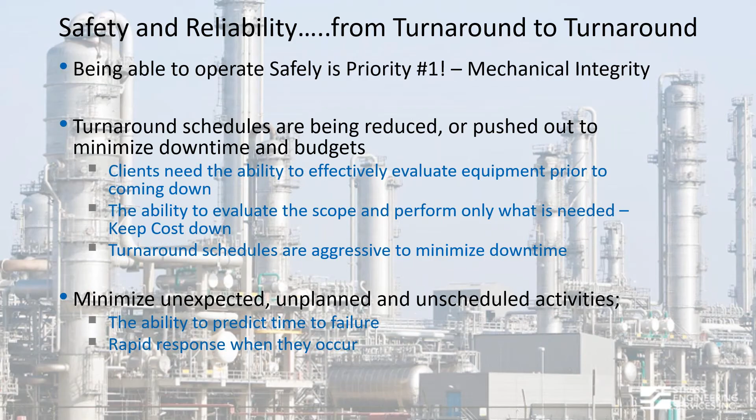Stress has been providing physics-based insights for clients for over 48 years. We got our start in the power generation industry, specifically nuclear, providing stress certifications for piping. As the nuclear industry began to slow down in the 70s, we moved our skill sets over to the oil and gas industry. Over the years, we have expanded into over 15 different industries, ranging from power generation, oil and gas, pharma, consumer products, aerospace, rail, and medical technologies.

The physics are the same throughout all of these industries. As we have expanded the industries we are serving, we continue to invest in our ability to deliver value to our customers. By participating in many different industries, we're exposed to many different problems, materials, and technologies, which enables us to transfer technology from one industry to another.

An example of technology transfer is how we utilize the skills developed in our lab performing full-scale testing, such as custom sensor design, data acquisition, and digital twin modeling, to measure G-force exposure during manufacturing and shipment of vials of biologics. This biologic was unable to experience excessive G-force, so we designed a sensor the size of a dime that could fit into a vial to measure force and validate handling precautions.

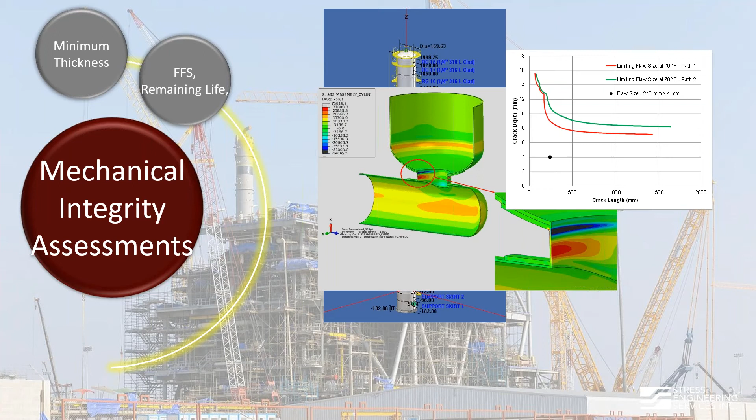Characterizing damage and performing fitness for service activities. The methods and acceptance criteria are fairly standard throughout the industry. However, the accuracy and applicability of the damage characterization, as well as bounding of the unknowns, can make a big difference in the results, conclusions, and the determination in the need for mitigations or other actions.

Checking the structural stability during maintenance or repair operations. Examples include, but are not limited to, access openings and stability during post-weld heat treatment. These types of assessments need not only consider the structural strength, but the potential deformations and their effect on the usefulness of the components after completion of such activities.

Considering the effects from process or heat transfer, whether it's consideration of the potential for slug or hammer flow in a piping system, or the expected thermal effects resulting from loss of insulation or refractory. Stress engineering can provide insights to these potential or actual conditions or scenarios.

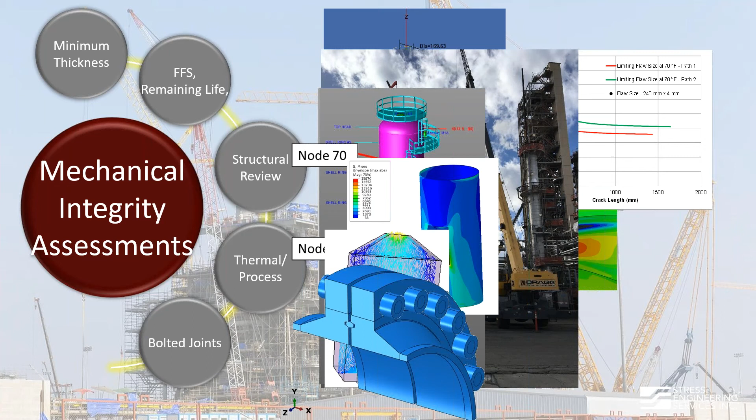Reviewing and assessing bolting joints, including, as applicable, the effects from thermal transients, in addition to checking stresses, reviewing gasket selections or bolting procedures. How the joints are expected to react to upsets or other thermal transients can also be simulated.

Collecting additional field data to validate or improve the precision of equipment models and assessment activities. This could be additional dimensional information requiring measurements or laser scans, material property validation that can be determined from testing of small material samples, or collecting strain, temperature, or actual acoustic emission information to determine more realistic loading and specific materials resistance capabilities. Derek has some further details on data collection services we can provide.

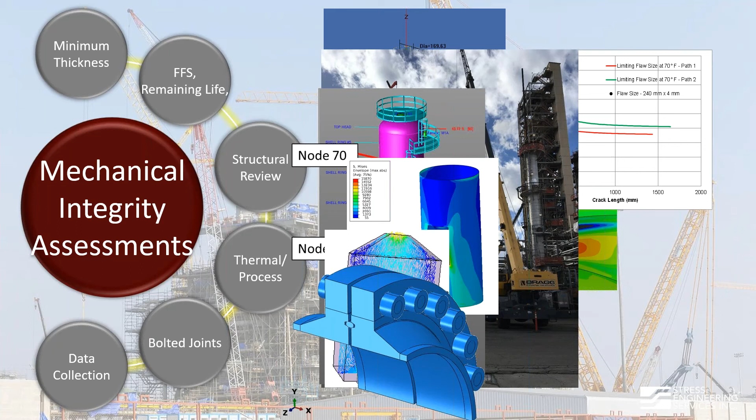Thank you, John. In the opening slide, I discussed how we support customers in evaluating critical components, whether it's for delaying a turnaround or evaluating an unexpected anomaly. What I can't emphasize enough is the more accurate the data, the more accurate the modeling and resulting assessments.

Typical types of data collection are acoustic emission testing, which provides a global screening of components to detect the active cracking in those components. This can actually be performed prior to a turnaround or a shutdown in order to detect those active crackings and locate them for further direct assessments during the turnaround.

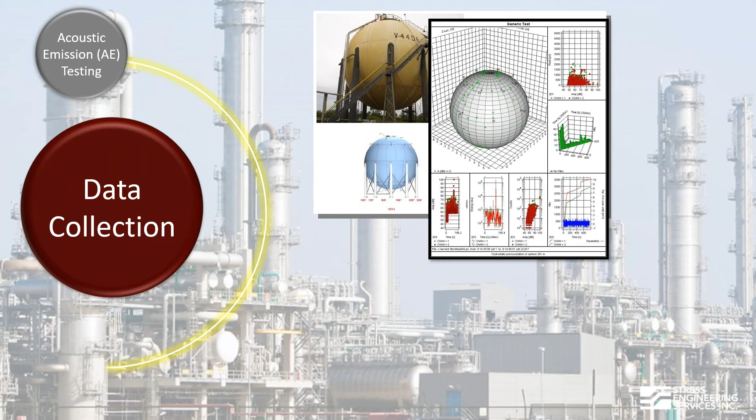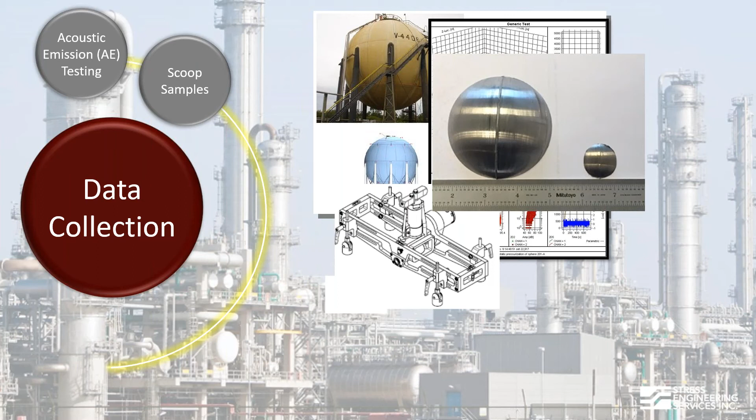Then there's our scoop sampling. It's the ability to extract material from in-service components to measure the properties of those materials. The scoops can range from about 1 1/4 inches to 3 3/4 inches in width. You can see the two sizes here in the picture.

In addition, we've got our rod load measurements, which is used for high energy piping. It enables us to offload a hanger and measure the load in that hanger, and determine the high stress areas in those particular locations.

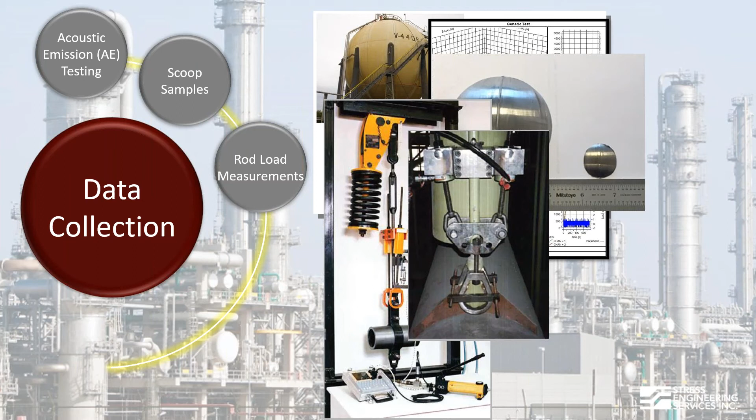Instrumentation, strain gauges, thermocouples—I'm going to talk more about that further in the presentation. But in addition, we've got laser scanning, and also there's digital image correlation, which is the use of optical techniques to acquire strain data.

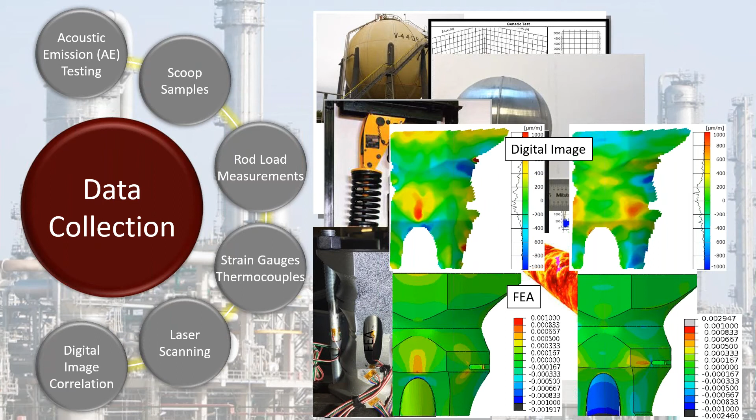Through the years, Stress has leveraged their expertise in sensor development, data acquisition, and data interpretation. Stress started performing full-scale testing over 40 years ago, and through the years we have developed significant expertise in those areas.

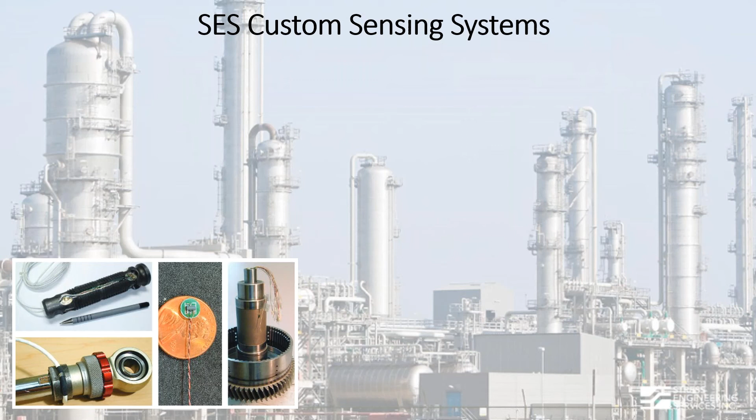As I outlined in my previous slide on how we transferred that technology from one industry to another, this slide demonstrates well how we took that technology from the shop or a controlled environment and moved it to the field in a manufacturing environment.

Many of you have seen this slide before at this conference. This slide outlines our coke drum health monitoring program, which starts by utilizing a laser scan to define the geometry of the coke drum, and it identifies the high stress areas of the drum.

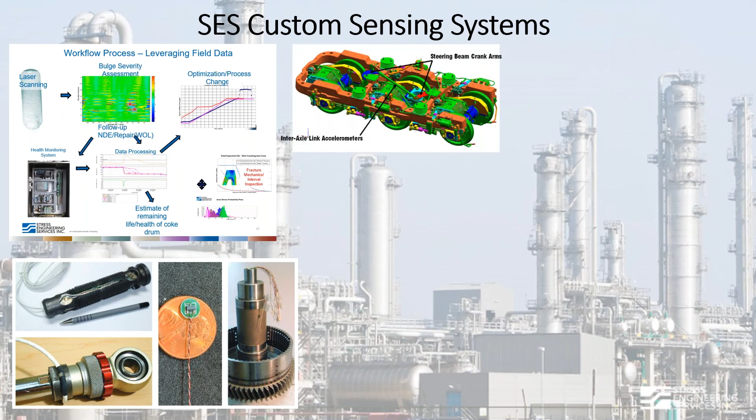We utilize that information to determine where we will locate our sensors and develop our repair plans for the bulges if needed. The sensors on the drums enable us to determine the rate of damage created by low cycle fatigue and provide feedback to the operators for optimizing the parameters to minimize the damage. Also, you can see on the slide a rail car bolster.

We have instrumented many cars through the years, and this particular one stress measured strains at 94 locations on a vented and non-vented bolster for powered and unpowered trucks, at known and potential crack locations and at various mid-plane locations to measure the overall structural response of the frame. We also measured accelerations and displacements of the truck and bolster while monitoring the GPS speed and location.

What you also see on the screen here in the middle is a tire mold. You can see there are 3 sensors in the mold, and we developed custom sensors to put in the mold with 6 degrees of freedom. These molds were being fabricated through additive manufacturing, and the sipes, which are the joints or lines in the tires, were cracking, so they wanted to measure the force being applied with the rubber as it pushed into the tire mold. So we had to develop custom sensors for that particular application.

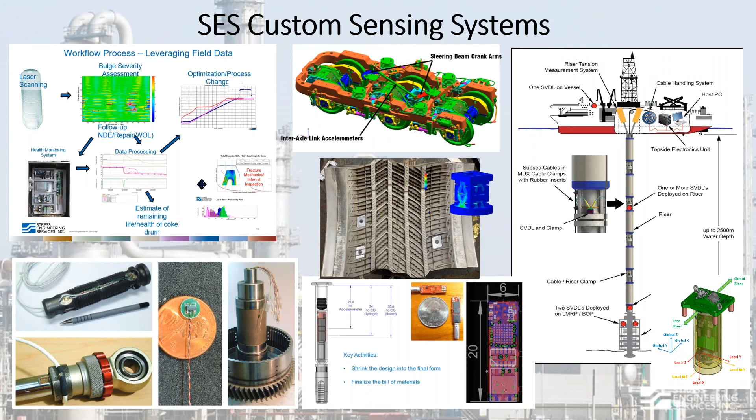At the bottom, you can see the valves that I spoke about earlier. These particular valves have accelerometers in them. In that mid-bottom picture, you can see a quarter on the table, and next to that quarter is an accelerometer that's going in the valve, to measure the G-force as the valve is passed through production and manufacturing, but also as it's being shipped via logistics. So you can see through this wide variety of applications for custom sensing, we've taken that technology and advanced it several ways.

So on the previous slide, I showed you examples of custom sensors and many different applications we have used those custom sensors in, to measure such things as force, whether it be those valves or, as I showed, the rail cars. But I want to provide you another example of some other different components we are measuring and how we have advanced this technology for condition-based monitoring.

As you can see on the screen, these are riser joints, which have a 5-year inspection criteria for being inspected. This is accomplished by rotating 20% of the riser onshore every year to be disassembled and inspected. This requires extensive boat trips and trucking of the risers. There are typically 20 riser joints from each riser system, transported on a boat, and 1 riser per truck to an inspection facility each year, making the logistics of the drilling inspection very costly.

These risers are obviously below sea level, and in that subsea application, these risers are bending much like guitar strings as they interact with the ocean's currents, causing damage at the joints.

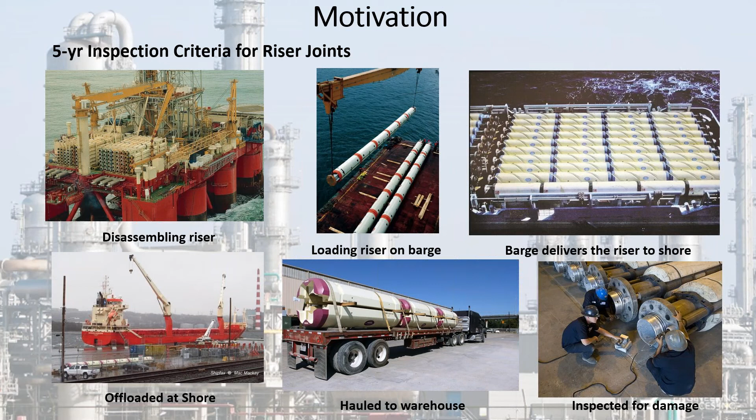Because of the cost and time required to inspect these joints, customers needed another approach, which was to move to a life cycle condition-based monitoring and inspection system that could be deployed on a mobile offshore drilling unit. The new riser monitoring system measures the load at the joints along with in situ drilling information and metocean conditions, from which riser joint fatigue damage would be determined and riser joints identified for inspection. Utilizing this process and incorporating machine learning, customers were able to experience significant savings in downtime.

Okay, Derek, thank you. Despite the specific industry, the types of equipment are typically consistent. Stress Engineering has experience in analyzing and assessing these common types of equipment and their components, as well as the technical expertise to assess the unusual or uncommon equipment types.

On pressure vessels, code and other industry RAGAGEP assessments can be provided to verify code compliance, to determine the acceptability of the current condition, or to estimate the remaining useful life or required inspection interval.

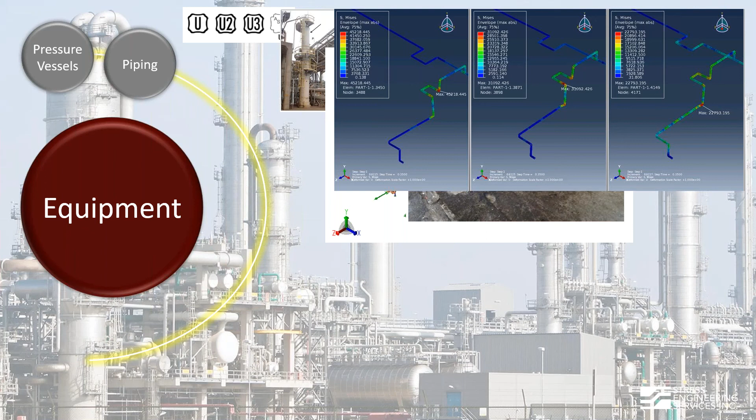Piping flexibility using traditional linear elastic or more advanced elastic plastic modeling can be utilized to verify not only code compliance, but also the localized effects from deformations or changes expected from high temperature exposure. Field verifications, including actual loading determinations on supports and hangers, can be performed in conjunction to maximize the accuracy of modeling activities.

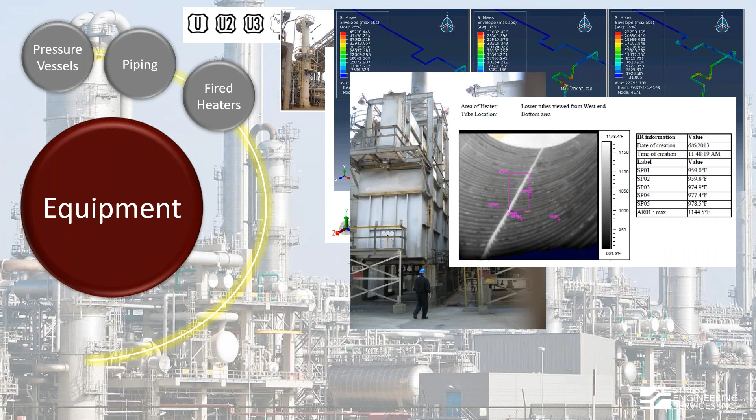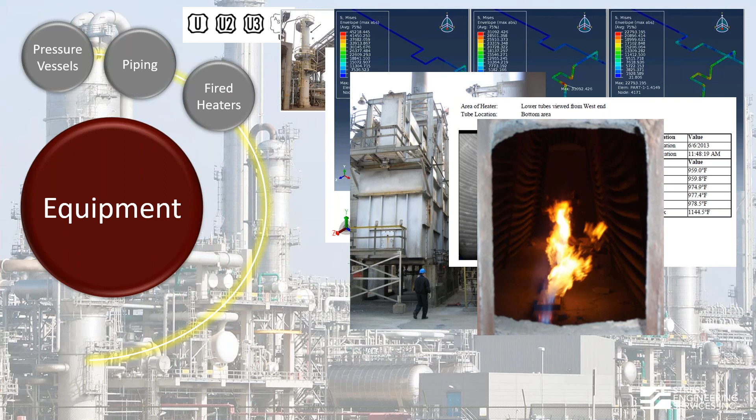The remaining life of tubes in fired heaters provides many challenges, from incomplete loading data to uncertainties in material properties. Stress Engineering offers the full range of assessment of fired heater tubes, from traditional remaining life determination to specific property determination using our accelerated creep testing facilities.

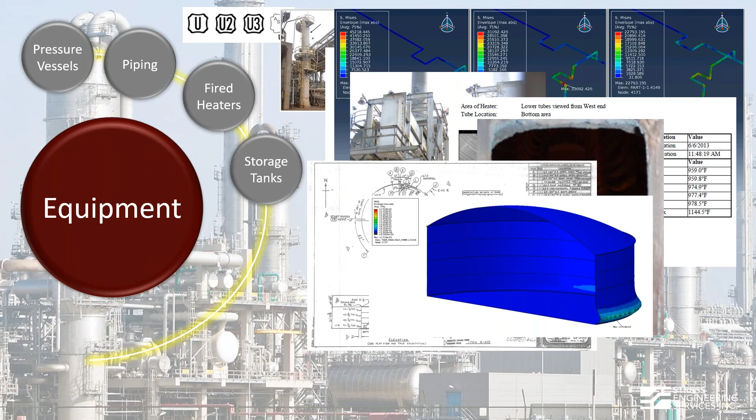From wind exposure to compromised foundations to damaged components, all in combination, Stress Engineering can provide authoritative assessments of storage tanks.

Heat exchangers are a subset of pressure vessels. Stress Engineering can assess the traditional TEMA designs, the air-cooled fin-fan coolers, as well as the compact plate and frame type exchangers.

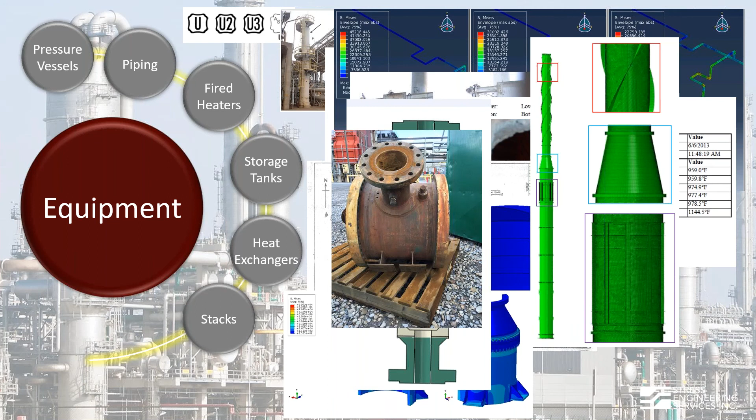Stacks, although similar to process towers, are subject to different acceptance criteria. Stress Engineering is familiar with the unique requirements for these assets and can advise on various mitigations and repair options.

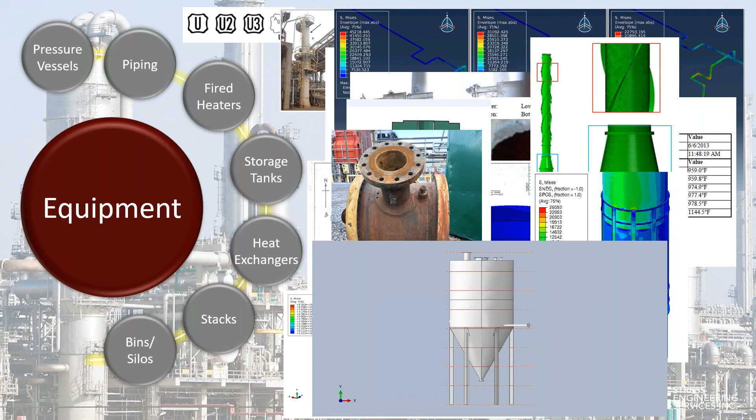Storage bins and silos, also similar to process vessels, are subject to differing loading conditions from the internal product. Stress Engineering can address these types of equipment and their unique loading.

Since one size does not fit all, and a computational solution to the degradation does not always result in an acceptable as-is condition, Stress Engineering can assist in the conceptualization and validation of unique and specific repair mitigations, clamps, and/or enclosures following the requirements of ASME PCC2 or other typical RAGAGEP for these types of solutions.

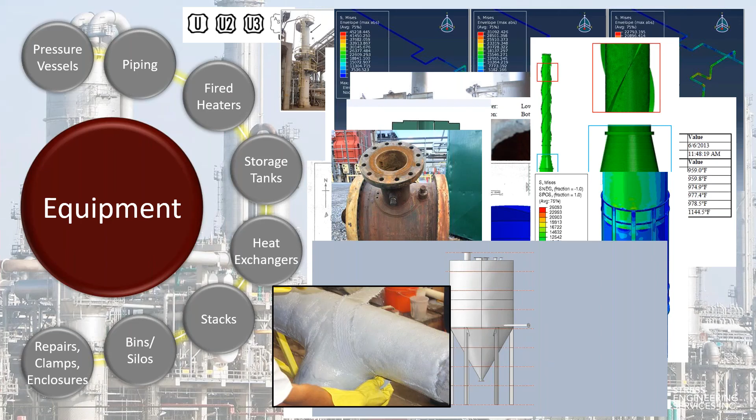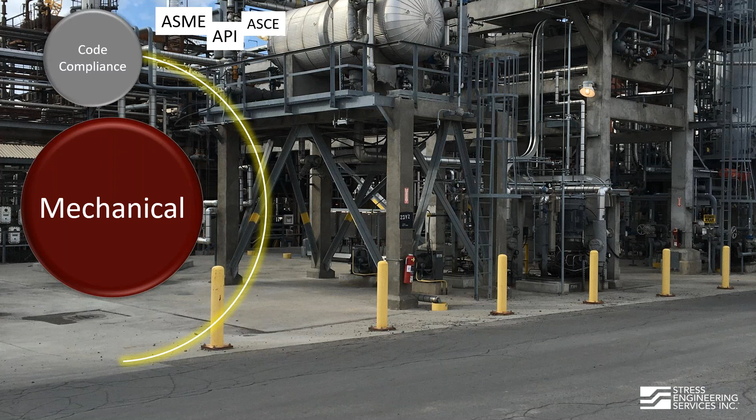Mechanical assessments of typical process equipment can run the full range from verification of code and fabrication rules to advanced modeling such as finite element analysis and computational fluid dynamics, to full-scale destructive testing.

Whereas traditional code formulas and approaches address design for a specific purpose, the use of these advanced techniques better quantifies the actual loading and material responses, therefore allowing for an assessment of a seemingly degraded or compromised component, and allows us to better quantify the reduction in margin, if in actuality any, from the original design basis.

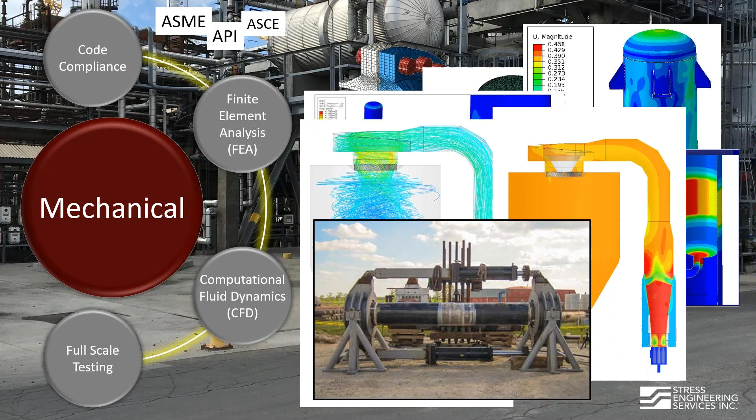Stress Engineering has full-scale testing at 3 locations in the Houston area, as well as high temperature and non-metallics capability in the Cincinnati office. Just a few examples of testing services that Stress Engineering can provide.

In addition to our polymer science testing, Cincinnati is home to our state-of-the-art accelerated creep testing facility. Over 60 fully instrumented creep testing machines can apply controlled loading up to 100 kips at temperatures up to 2,000 degrees Fahrenheit.

That's plus or minus half a degree Fahrenheit, while measuring strains on the order of 10 to the minus 6 per hour, with the results expressed in both MPC Omega and Larson-Miller parameters.

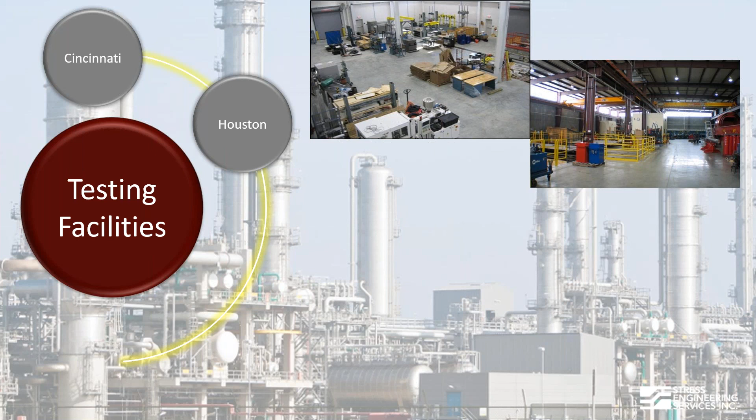In Houston, fatigue testing can include full-scale, mixed loading, have the effects of corrosion included, as well as resonant bending fatigue testing. From over 6 million pounds to less than a gram, a full range of standard and customized tensile compressive testing can also be accommodated.

In Waller, Texas, and in our Moore facility, burst testing up to 60,000 psi internal or 30,000 psi external, as well as other load testing, can safely be conducted.

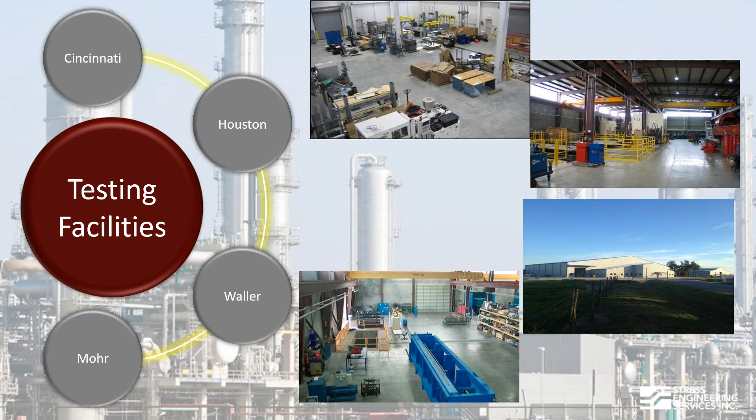Thank you, John. I'm going to describe here our materials and metallurgy capabilities.

Failure analysis and material testing, including the quantification of damage from creep as well as other damage mechanisms, is integral to assessing the mechanical integrity of equipment and components. Stress routinely performs these activities for our customers as part of a fitness for service assessment or remaining life assessment, to help them determine if a component can make it from one turnaround to the next.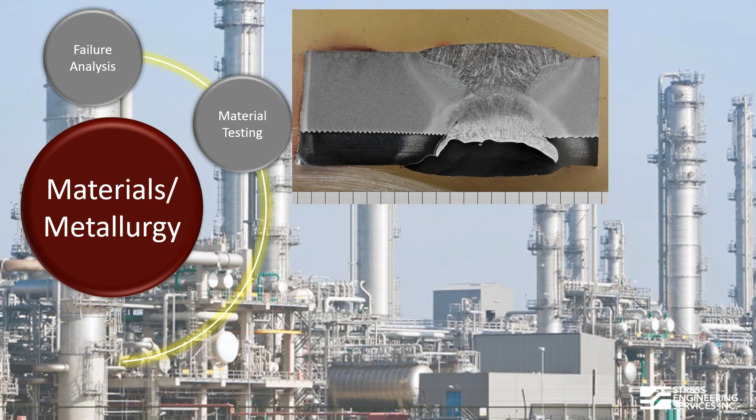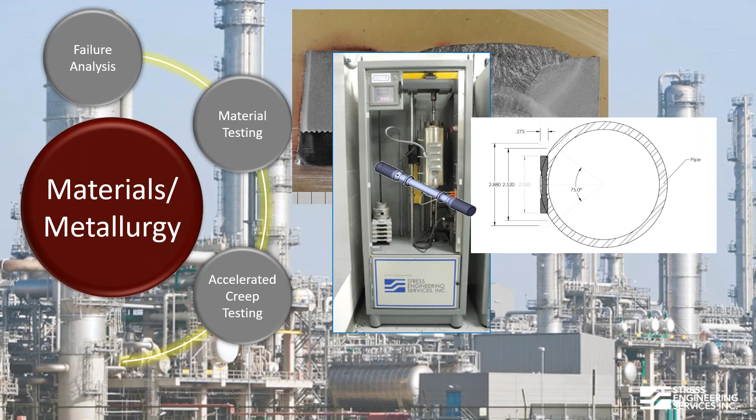Failure analysis - understanding why a material failed is as important as understanding why it succeeded. A large portion of the materials work that Stress performs is directly or indirectly related to failure analysis. Whether it is validating a material's performance in an environment through comparative testing or understanding why a material failed, Stress has state-of-the-art equipment along with experienced material engineers to perform that.

From the material testing capabilities, we do full characterization of materials, which include chemical compatibility, aging and life assessments, creep and stress relaxation. In addition to that, we do a lot of accelerated creep and fatigue testing, and as John outlined before, we have over 70 creep frames in our lab.

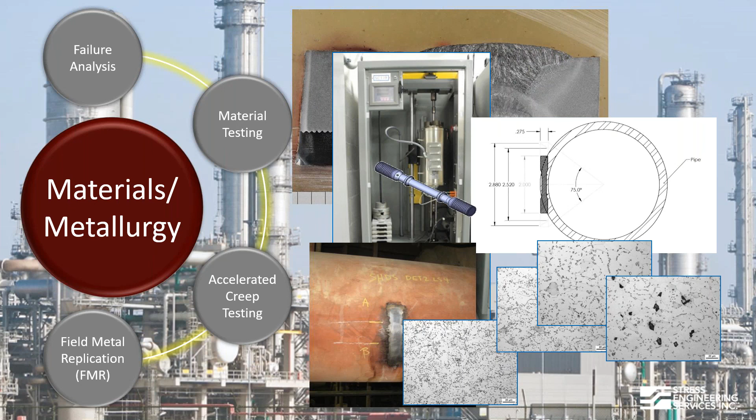So here's some examples of some material testing we've got. This slide shows examples of several material test methods used for evaluating materials. Fatigue testing, or what's affectionately called bouncing beams, is what you see here.

This test is designed to determine the fatigue life of a threaded or welded joint by turning an eccentric weight, the yellow end effect that you see in the picture, and putting the pipe at its natural frequency.

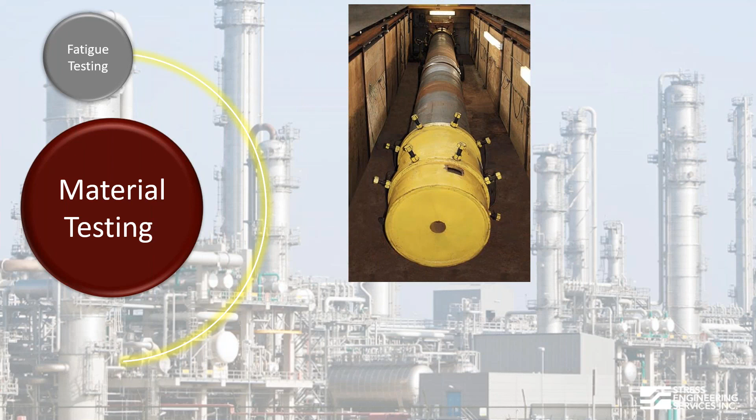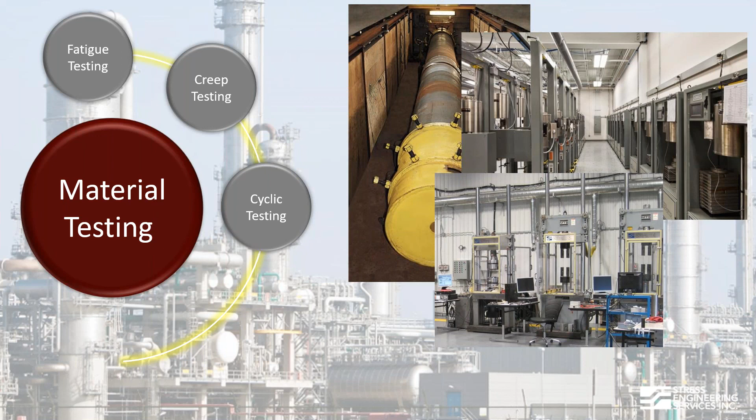In addition, as we described earlier, you can see the over 70 creep frames in our lab here in Cincinnati. You also see cyclic testing in order to test materials that are going into cyclic environments. And then there's the CTOD, crack tip opening displacement, also in our lab in Cincinnati, which tests non-metallics as well as metallics with miniature samples.

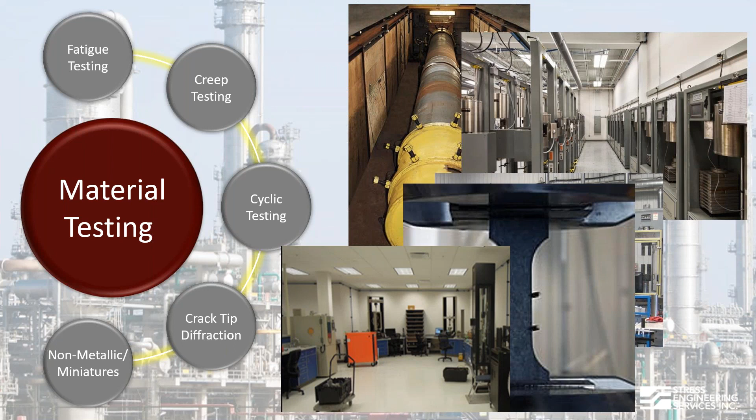As we conclude this presentation, what I wanted to make sure of was to let everyone know that Stress is following RAGAGEP and industry guidelines, which allows you to meet your safety and reliability objectives.

Stress utilizes the following resources and capabilities to facilitate our analysis and assessments. We've outlined in the presentation today material characterization, full-scale testing, simulation and modeling, and most importantly, on-site testing and monitoring.